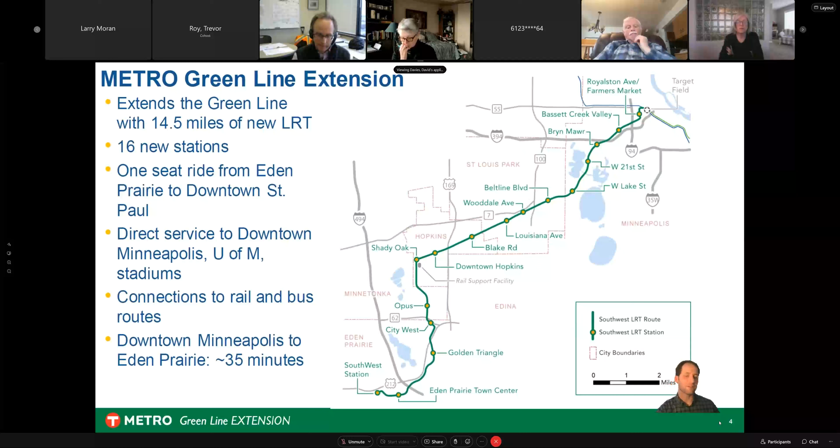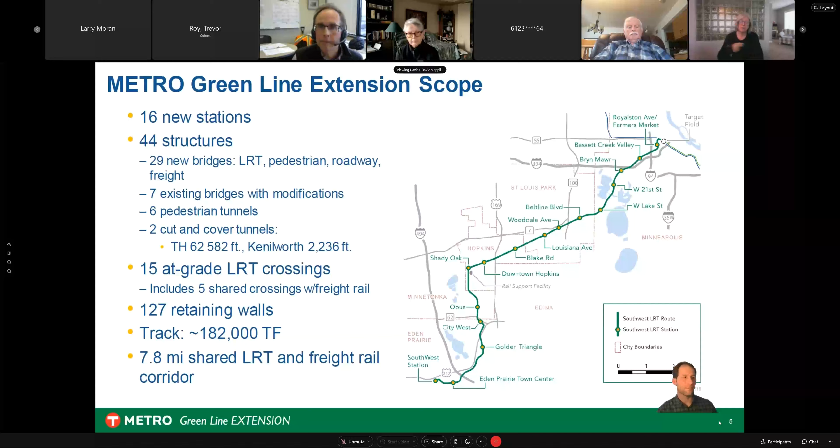As we move forward, we're going to continue with civil construction. We'll talk about that schedule in just a couple moments. But we have already started to initiate one of the other main portions of this work, which is the systems work, which is where we run the electrical and construct the overhead catenary system, our communication system, things like that. And then, of course, prior to opening, we will be conducting testing of the line before we have passengers on it.

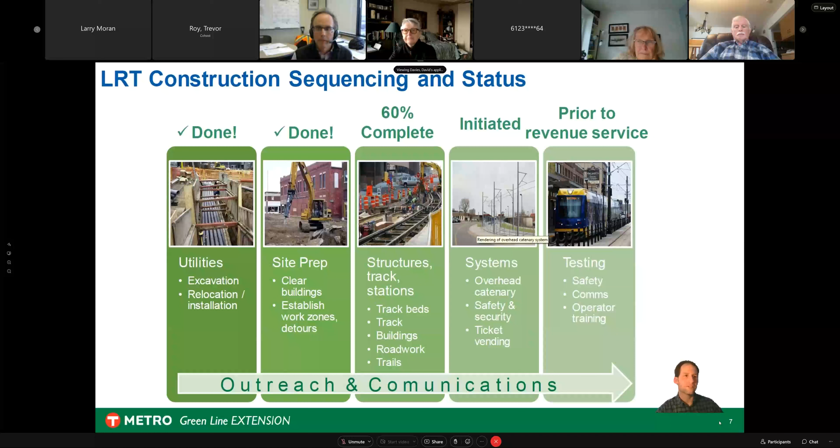So, as we're speaking to the Minneapolis community tonight, we know that the community is very familiar with a couple of the main challenges faced by the project, but just wanted to run through them tonight. These are challenges that were either relatively unforeseen, or we knew about them but needed to work through them in a specific manner and order.

That includes the corridor protection wall up near Bryn Mawr and into downtown Minneapolis that was added by change order, even after the project started construction. That certainly has added some significant time to the construction schedule, specifically that schedule in Minneapolis.

We'll probably talk a little bit more about the secant pile retaining wall adjacent to the Cedar Isles condos. That was due to unforeseen soil conditions, right? The settlement that had occurred, and out of an abundance of caution, we pivoted away from the initial sheet piling method that was incorporated in the project to this different and more conservative method of retaining soil so that the tunnel could eventually be excavated. That's another major complex change that had to be overcome and has caused delay.

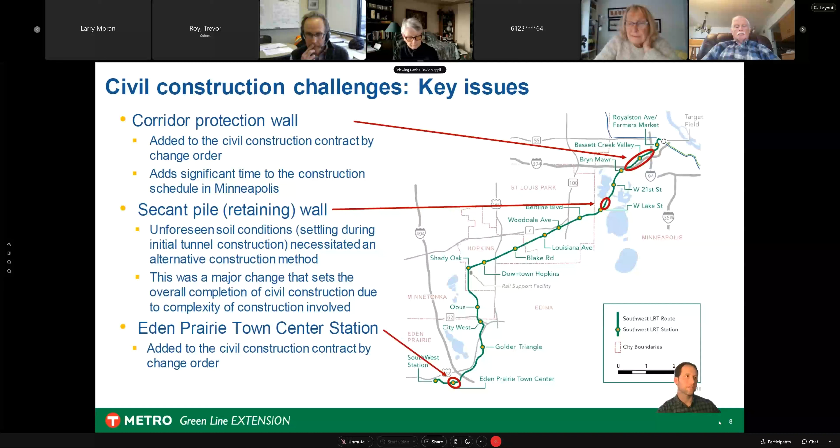We've laid this out in a couple meetings before, but we came out in January with information about a revised schedule and anticipated revised cost. We wanted to step through that with folks briefly tonight. We've been doing this in a number of different meetings. We want people to get a really good understanding of what goes into the revision of the Southwest Light Rail schedule. So what you're seeing here is we've got the original civil construction schedule and cost, but now due primarily to those changes that we just went through, we've got a new scope, right? And new civil construction needs that need to be addressed.

Those needs are being addressed through an agreement with Lunda McCrossan Joint Venture, our civil construction contractor, and the resulting change orders that will be processed, which will result, unfortunately, in an additional 34 months of anticipated civil construction. So the take-home message here is we've got our original schedule, we've got the changes to the project, which add on this time that's needed to construct those changes and deal with those changes, and that gives us the revised civil construction schedule and eventually the cost.

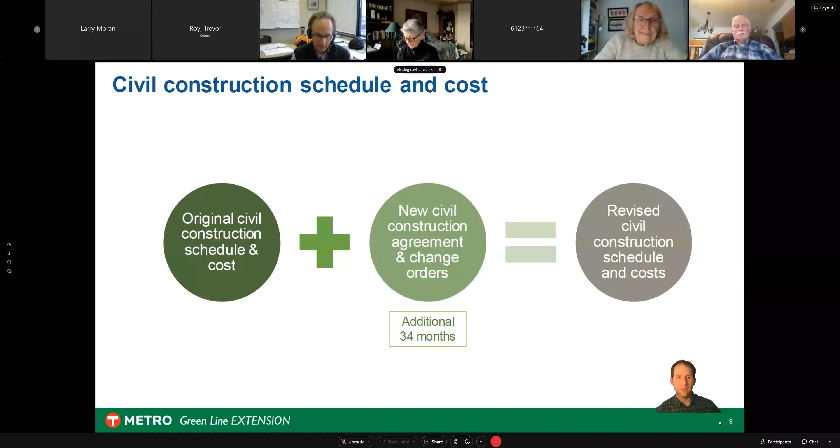The next step is then to undertake a similar process, which has already been started. It's not like we have to wait completely for the civil agreement to be signed in order to start systems. This process has already begun, but it's something that needs to also be done in order to then progress on to revising all the other supporting contracts, and also provide time for that testing that we talked about a couple minutes ago, to arrive finally at a final revised project opening day and cost, right? So we are still where that arrow is. We've got these other steps to take.

A lot of people want to know what are the details behind this delay in this work, this added time and the cost. We're still figuring some of that out, right? There's still clarity to be had there, but we've been working at it for over a year now with the civil construction agreement, and we're working diligently.

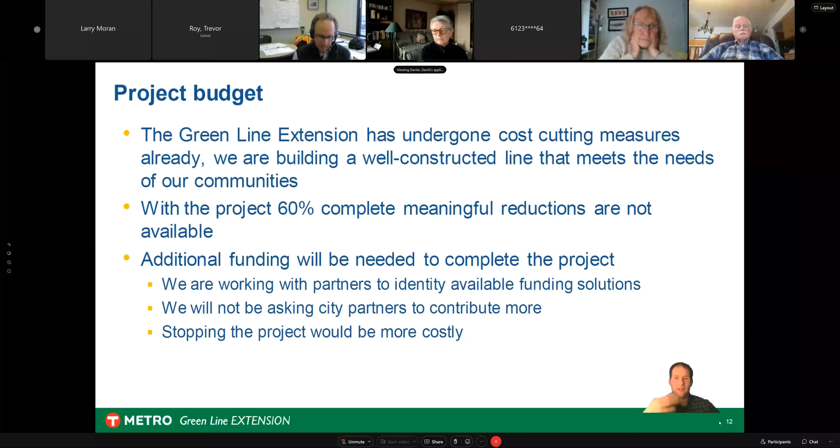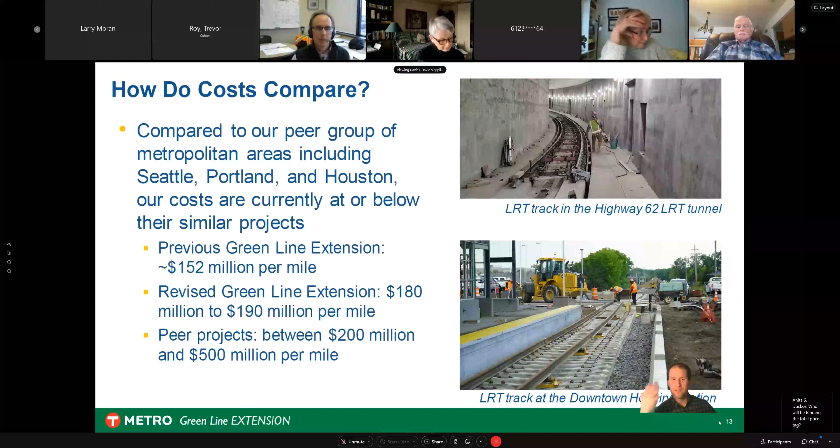So just giving you a little bit of comparison here from what was the original project budget of 152 million per mile, right? That's being revised upward, but we also see peer projects that are still in that 200 to 500 million range. Certainly, there are other projects that are less. You can find projects that are less, but we do want to just acknowledge that we still remain comparable to projects across the country, especially given the complexities of some of these that have a lot of bridges or tunnels, those very complex features that we are dealing with.

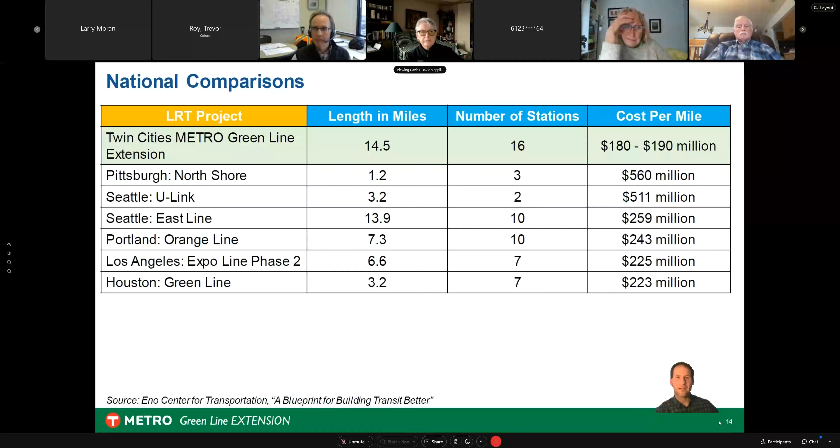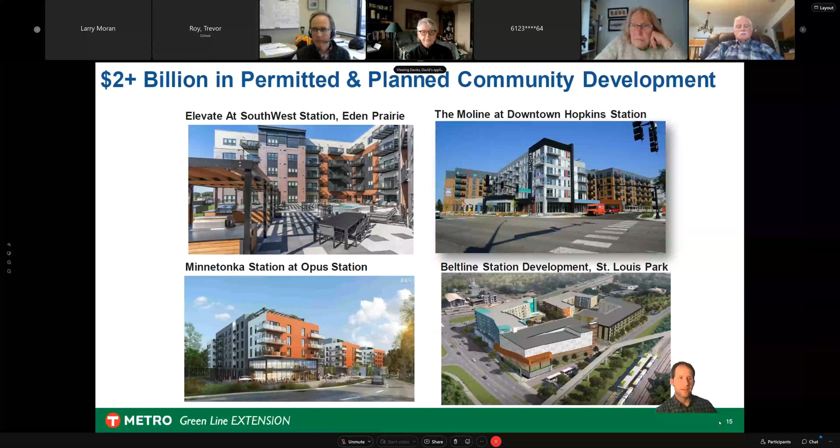We always like to remind people too, even though the project is delayed, we've still seen a lot of investment already in this corridor, and we're going to continue to see investment, which is a really positive thing. So these are just a few examples, but it's exciting to see these entities already being active, and the corridor already starting to activate and be ready for our opening day.

Of course, we always like to report on and have people aware of the disadvantaged business enterprise goals that we have set. Just want to make people aware of those tonight, that we are currently achieving a lot of those goals, or getting close to achieving those goals, when it comes to the disadvantaged business enterprises that are associated with the project.

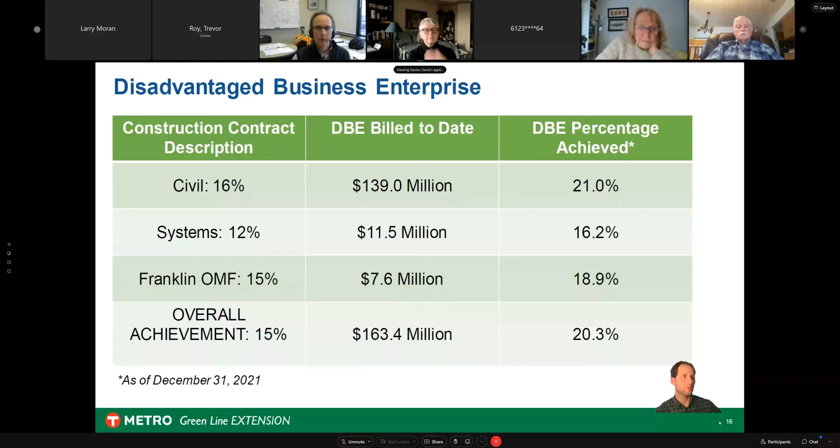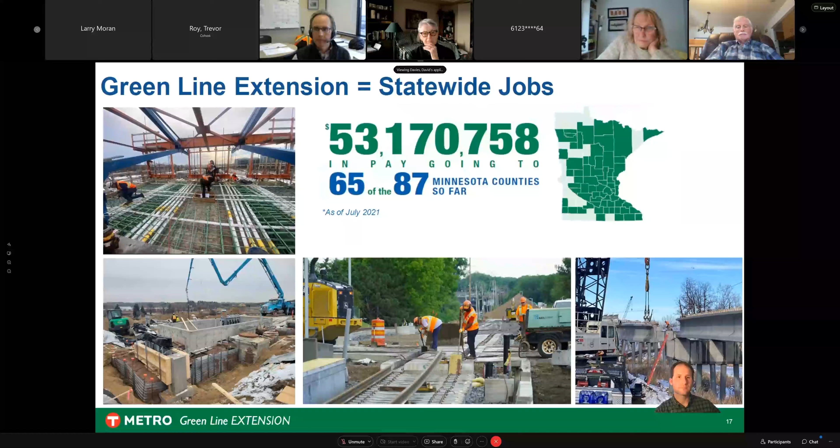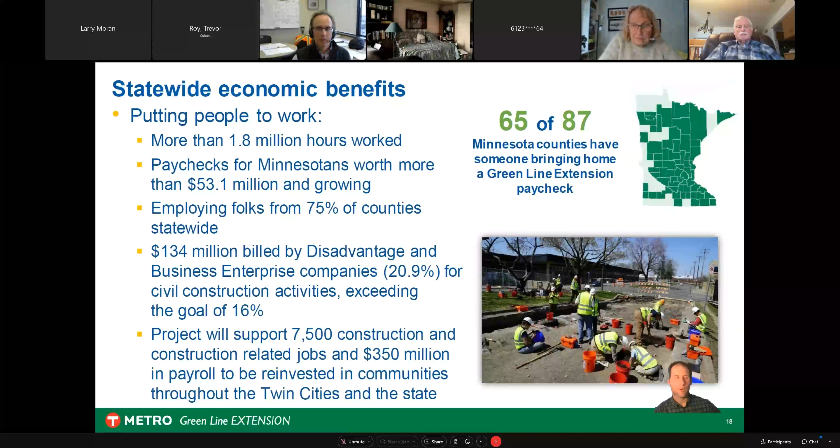And finally, this is our last couple slides here for project update, and then we'll take a couple questions. But it's important to always remember the people who are working on this, and we're not talking necessarily about council staff, but there are a lot of folks here that are continuously employed as this work progresses. So there's a lot of pride in that amongst the people who are involved here, and we always like to make sure that people are aware of the folks continuing to bring home paychecks as we're progressing with construction. This slide basically says that, but gives you a little bit more meat on those bones in terms of the number of paychecks and how much money is being brought home by people who are affiliated with the project.

So I will pause there. I'm going to pivot to the chat and just see if there's anybody that's given any chat questions here.

And Anita asked who will be funding. We got a question about who will be funding the total price tag. That's certainly something that all the project partners are going to be figuring out in the coming months here. That's sort of that acknowledgement that there is a funding gap, but everybody's working hard to figure out what to do there, especially as we move forward and have clarity with the exact tag, once that becomes clear.

And Anita, I think I see your hand up. Yes, just for clarification, because you said on one of your charts that it wasn't going to be the city that was going to take on that price tag. So I just would be interested in knowing, if it's not the city residents or taxpayers, then who would it be? Not that you have a total answer, but who else is at the table that you're even considering?

Thank you. Say, David, this is Jim. Maybe I could speak to that. Sure, Jim. Thanks. All right. So in terms of the funding, the council actually just had a business item with the transportation committee and the management committee last week to advance $80.6 million to the project. That comes from monies from the council via the federal government, and also we have grant money left with Hennepin County to add to that total.

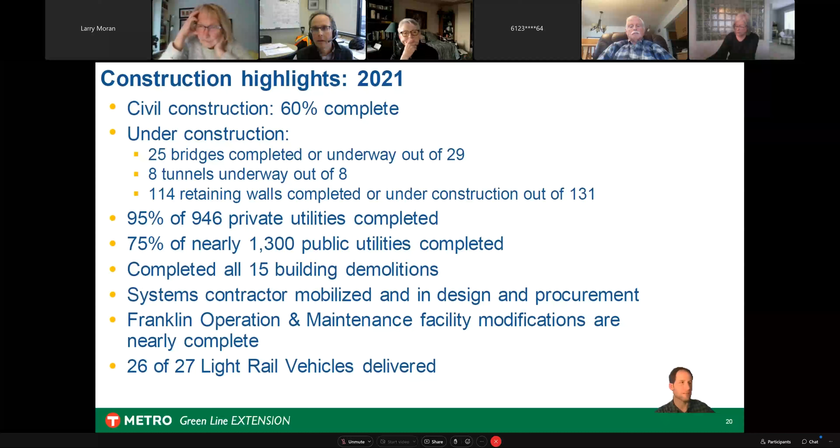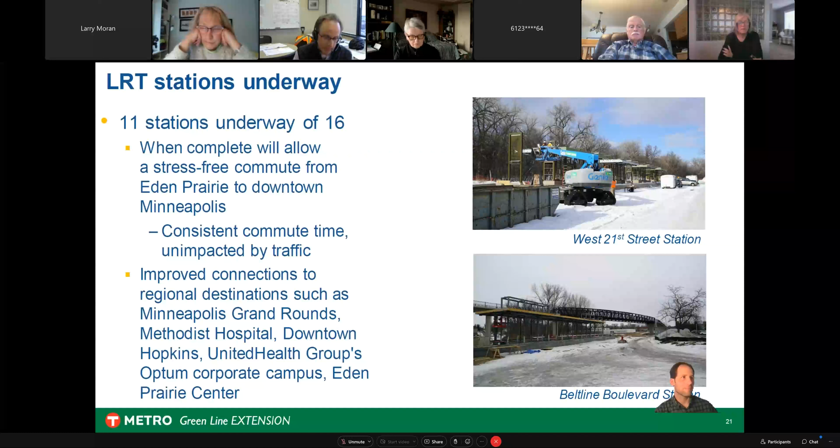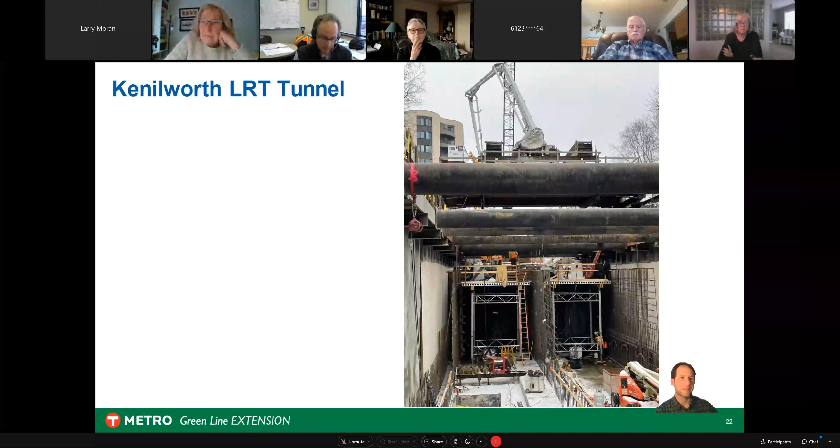Let's see. Of course, wanted to note that in 2021, a lot of progress was actually made on the Kenilworth Tunnel, and it's pretty neat. We love this picture. This is one of those where you start to squint. You really do see the finished conditions, right? The two portals through which LRT is going to be traveling in the tunnel. Of course, that's going to be covered. You wouldn't see it exactly like this in this spot, but it's neat to see that perspective of construction.

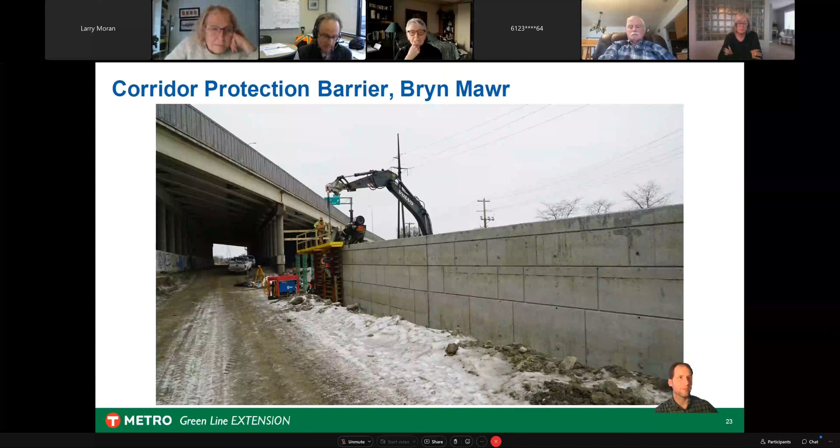One notable element that we've put a little bit of time into talking about tonight is the corridor protection barrier in Bryn Mawr, and it's notable that the contractor has really been able to be successful in moving this construction forward. If you're traveling along the Cedar Lake Trail in that area, you see some significant progress in the drilled shafts and the rebar that was erected. And now they've been pouring concrete panels for much of the past 6 to 8 months, to see some real significant progress there. So that's encouraging news over in the Bryn Mawr and Bassett Creek Valley area.

Just wanted to note one other area here. We'll talk about Glenwood in a little bit, but the bridge structure coming out of the Royalston Avenue Farmers Market Station has seen some notable advancement, even more so. This was, I think, last fall, but they're continuing to work here on the structure that ties into the Target Field station. So pretty neat to see that level of completion on that structure closer to downtown Minneapolis.

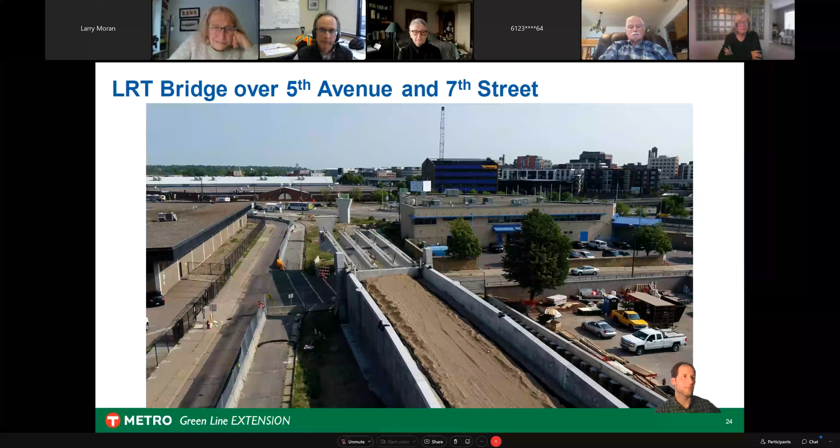So just briefly wanted to cover some of the notable activities and things that you're going to be seeing this year in Minneapolis. Move my camera here so I can see my other monitor here.

So of course we have secant wall construction, which is currently paused, but we see tunnel construction, overall construction of the tunnel that includes excavation, that includes secant wall construction, that includes actual forming and pouring of the tunnel structure itself down in the excavation area. We see that all progressing, continuing to progress this year through 2022.

We had a meeting earlier this year about the closure of Cedar Lake Parkway, and at the time, we certainly thought it was going to be closing earlier than it has. It has not closed yet, but we still anticipate about a 10-month closure.

Right now, as of say last Friday, when we put out our newest construction update, which please sign up for, we think it's going to be probably more in that April timeframe to close down the Parkway. But once that's done, we'll be excavating and constructing the tunnel through that area.

You'll also see coming this summer and fall more activity at the Kenilworth Channel area. You'll see the anticipated demolition and construction of the third bridge in that area. So we have the freight bridge, which is complete, the LRT bridge, which we anticipate being in an advanced state of completion this year. And then the third bridge, which is the trail bridge, is likely to start construction

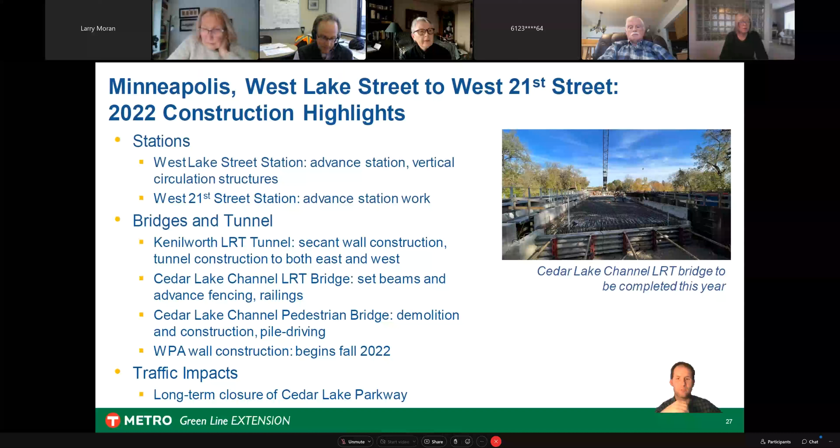Notably, as we talked about, is the long-term closure of Cedar Lake Parkway, which we will continue to provide updates on and make sure the community is aware of prior to the closing.

I'll use this opportunity, if you haven't seen our video for how we construct the tunnel and how this will be phased through Cedar Lake Parkway, I just posted a link into the chat. This comes out of our meeting that we had in January about the closure. I encourage you to watch that; it gives a little bit more perspective on what's going on in terms of tunnel construction and the closure of the Parkway, why we need so much time.

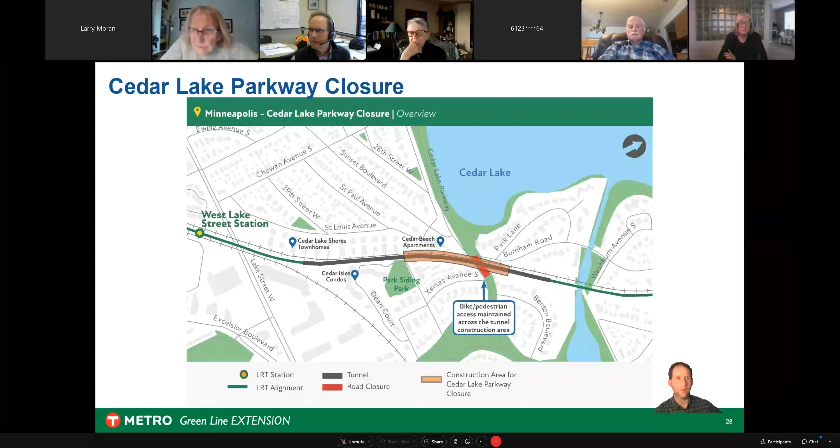All right, moving on. So we're moving up into that Bryn Mawr and Bassett Creek Valley and downtown Minneapolis area. So overall, what you're seeing is advancing the 3 stations in this area, at Bryn Mawr, at Bassett Creek Valley, at Royalston Avenue Farmers Market. Down at Bryn Mawr, you're going to see continuing work to construct the pedestrian bridge there that connects the intersection of Wayzata and Penn to the actual station itself, out in the trail and rail corridor area.

We do anticipate that there could be some traffic impacts at Wayzata and Penn for some of that station construction. That's been a relatively quiet area, and our Bryn Mawr community members have been curious about when that's going to take place. We'll want to be in touch with them as there's more clarity regarding that schedule. Corridor protection wall continues, as we've talked about.

And then, moving up into the Royalston area, one thing that we haven't done a lot of in Minneapolis that we've done a lot of in the west part is actual road work. A lot of our work is in the rail corridor. We've had roadway impacts or very targeted roadway work, and we will continue to have some of that. But there's going to be some pretty significant road work along Border Avenue and Holden Street, next to the Minneapolis Farmers Market.

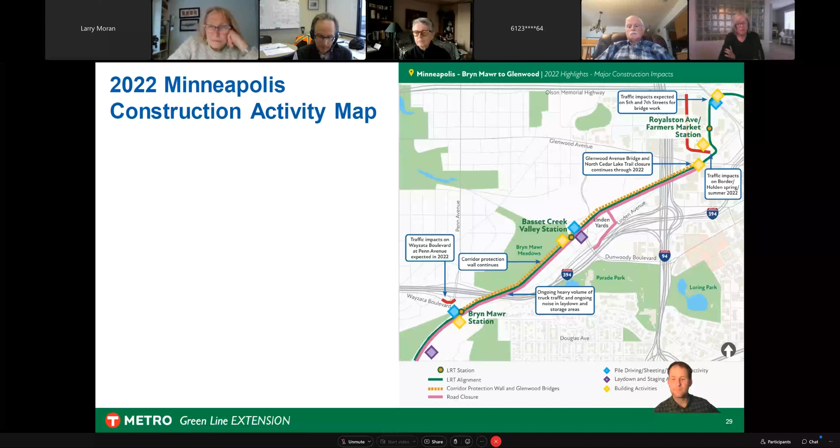So just to recap, stations are certainly going to be active sites this year. Corridor protection wall, you'll continue to see a lot of activity there.

Glenwood Bridge is certainly something where we've experienced some challenges. As we've talked about in the past, it's always challenging constructing this type of complex structure. Remember, it's three specific structures - kind of two parts of a roadway bridge plus the LRT structure, and it's all next to the active freight rail.

And then, as I showed earlier, the image of the 5th and 7th Street LRT bridge that ties into Target Field - a lot of work on that area around the Herc incinerator as that structure gets closer to completion.

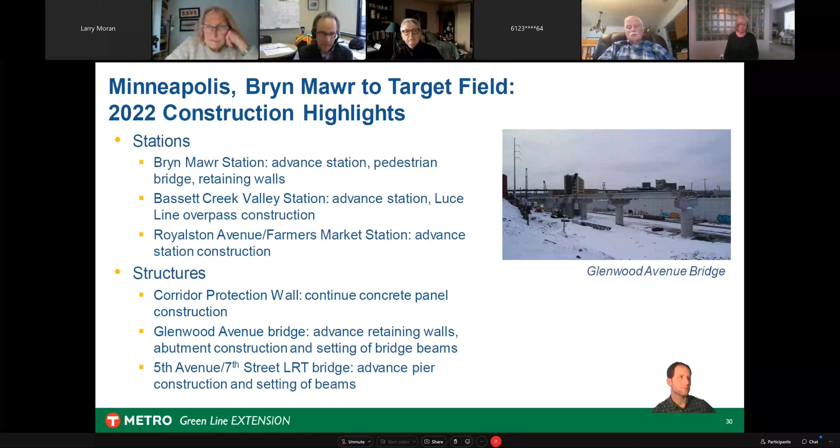Traffic impacts - we've kind of summarized this, but Border and Holden certainly going to be active for most of this construction season. 5th Avenue and 7th Street around that Target Field area is going to see some impacts, probably as we're setting beams or constructing overhead. And then something for the Bryn Mawr folks - the Wayzata and Penn area for that roadway reconstruction near the station.

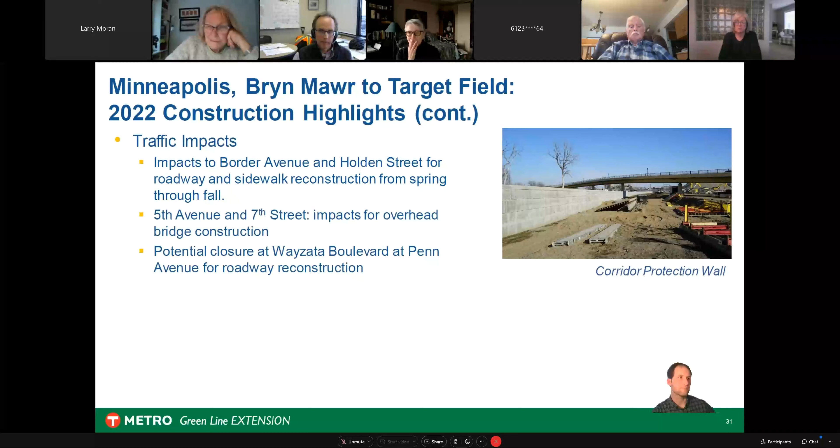Just a couple notes on the group that I am a part of on the project office, the communications and outreach team. Even though construction events were fewer, we still had a very busy construction season last year and took a lot of calls, answered a lot of emails, and still had a lot of meetings, both on-site and virtual, connecting with the community.

Here's my information. I think a lot of folks at this point on this call would probably have my information, but I certainly encourage you to reach out if you continue to have questions or are curious about any part of the construction. As COVID seems to be a little less severe, this coming summer we'd really like to get back out there and do more tours, getting people up close and personal to some of these construction elements, letting people see firsthand what's going on out there. They're really great opportunities. We'll be advertising those opportunities as they come up.

But one thing I wanted to note in terms of what we want to do this year - in Minneapolis, I feel lucky that I get to connect on a few different levels. We've got these big plenary meetings where we get to talk to an entire community at once. I get to go, monthly or every other month, to some of the neighborhoods - the Cedar Isles Dean neighborhood and the Kenwood neighborhood, sometimes the West Maka Ska neighborhood - to present there. And I also communicate with people on an even more granular level - sometimes it's apartments or condo associations, sometimes it's block leaders.